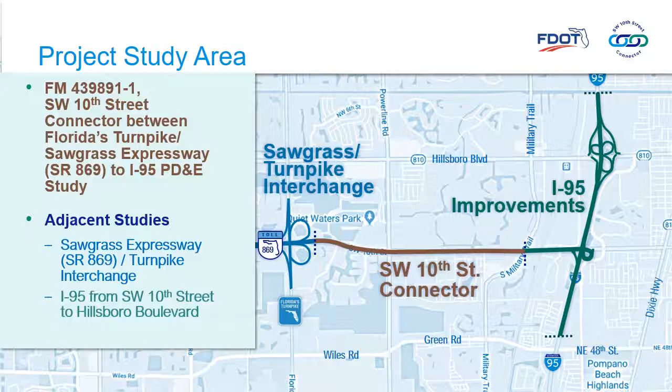The Southwest 10th Street Connector study is located between Florida's Turnpike and I-95. There are two adjacent studies that include I-95 from Southwest 10th Street to Hillsboro Boulevard and the Sawgrass Expressway and Turnpike Interchange. The Broward Metropolitan Planning Organization, or MPO, formed a Community Oversight Advisory Team, or COAT, to provide recommendations for the project study area. Recommendations such as safety, improved operations, and environmental considerations have been incorporated into the project's purpose and needs statement, and all recommendations are being fully evaluated during the study.

The purpose and need for the Southwest 10th Street Connector is comprehensive and includes many of the COAT's recommendations. Providing a limited access managed lane connector facility along the corridor between the Sawgrass Expressway and I-95 will improve system connectivity between Strategic Intermodal System, or SIS, facilities. I-95, Florida's Turnpike, and Southwest 10th Street are all SIS facilities. SIS facilities are those that are critical to statewide mobility and economic development.

Local transportation needs for Southwest 10th Street will be addressed, including the application of complete streets concepts. Safety and operational issues will also be addressed along the corridor and will improve emergency response and evacuation times, since I-95, Southwest 10th Street, and Florida's Turnpike are all designated evacuation routes. This project will also encourage intermodal relationships and economic development for the area. Next is a short video about the Southwest 10th Street Connector.

I've lived in Deerfield Beach for 15 years. Feels like nice Florida. Great beaches, great food, great atmosphere. It's easy to get to Miami, it's easy to get to West Palm Beach. Everything we could think of is located conveniently within the city. We love it here, and we wouldn't consider living anywhere else. But the traffic on Southwest 10th Street has always been a bit of a challenge. And more recently, we've noticed more traffic in non-peak hours.

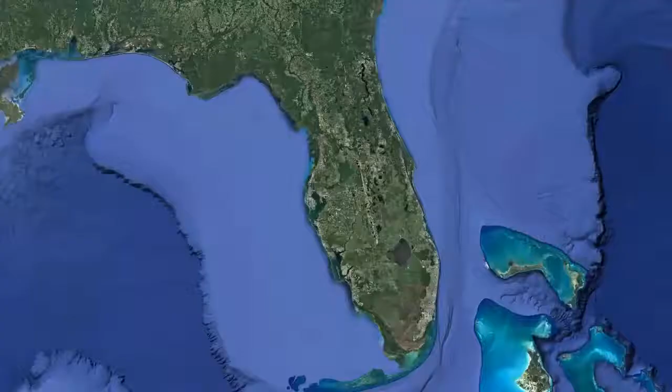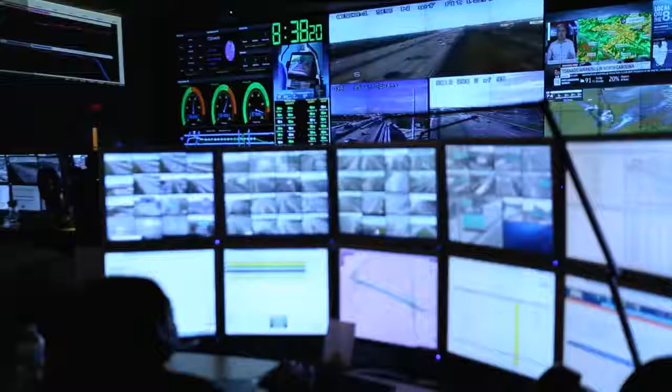The goal with Southwest 10th Street is to improve the connection to I-95, as well as provide a regional connection through a managed lane system to the Turnpike and the Sawgrass. In addition to those improvements, we will provide a new complete street local facility, which will provide bicycle, pedestrian, as well as vehicular mobility. Improvements to the corridor would allow us to actively monitor the roadway, to be able to communicate with first responders and to let them know what is needed, and we can send the proper resources out to mitigate incidents that occur.

By providing the managed lane system, we are significantly reducing the number of vehicles using the local Southwest 10th Street, which will reduce the travel time for those who are using the local facility, provide you a quicker time to get to your home and or business that you're visiting. If we want to keep growing and sustain that growth, we need to plan down the road and allow for this growth to happen. The connector will help our area as well in the fact that now people won't avoid 10th Street for fear of the traffic.

The end result will better my commute and better my experience with the road. 10th Street will now be a connector that people can get on and go to our local businesses and actually not have to worry about being stuck in traffic. Helping the local neighborhood and local residents, that is something to be excited about. It's a great opportunity for us to take advantage of working with our partners to solve our congestion problems today and into the future.

The Southwest 10th Street corridor represents a gap in the regional managed lanes network. This corridor is an important SIS link between the Turnpike and I-95. The Turnpike and I-95 are the backbones to the north-south movement for people and goods throughout the state of Florida.

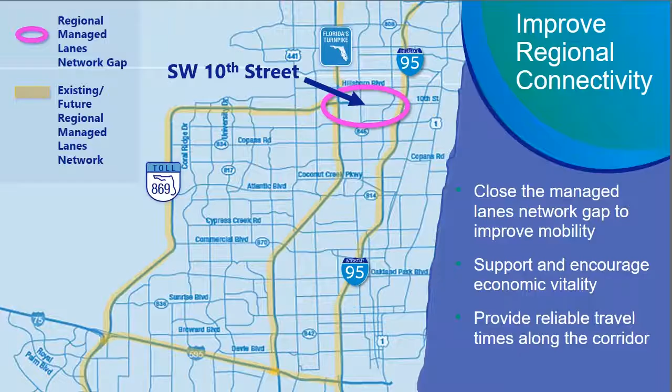Implementation of a managed lanes connector roadway, along with an improved local roadway for Southwest 10th Street, addresses COAT recommendations and will complete the regional network and promote mobility and economic vitality of the area. An improved local Southwest 10th Street will retain access to communities and businesses. Complete Streets elements will be incorporated in the design of the local roadway, including bicycle and pedestrian features, a lower speed, and landscape aesthetics features.

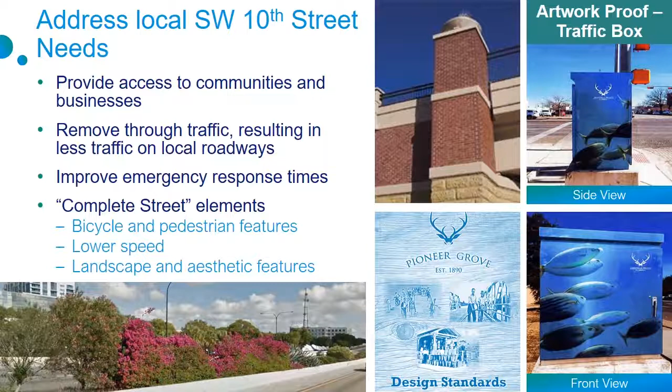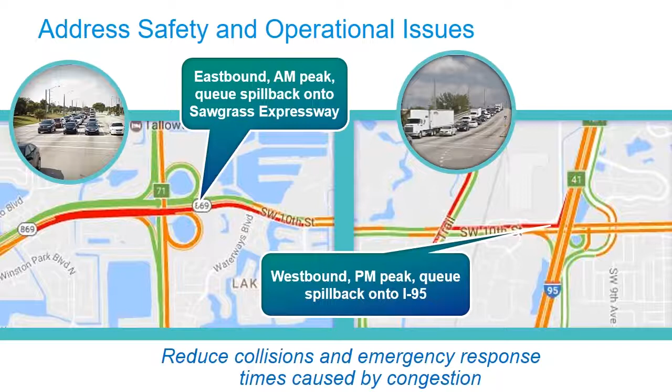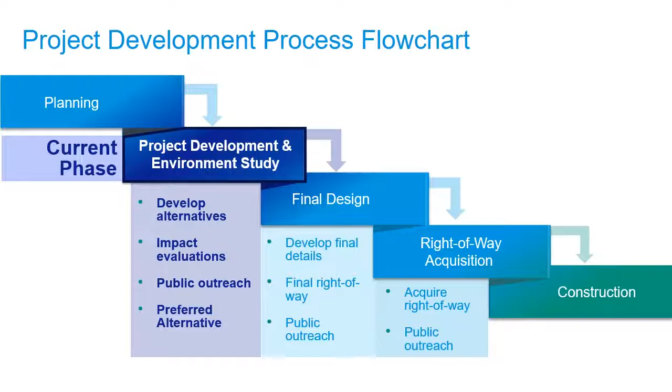In the PD&E phase, engineering design alternatives are being developed. Community outreach and agency coordination are occurring along with evaluations of environmental and community impacts. At the end of the PD&E process, the FDOT will recommend a preferred alternative. The PD&E process follows several steps. We're currently conducting the engineering and environmental analyses, holding the alternatives public workshop, and preparing draft documents.

During the engineering analyses, alternatives are developed to meet the purpose and need of the project. Potential impacts to the corridor's social, natural, and physical environments are being studied and documented. A continuous community outreach process is integrated into every step of the process to ensure that residents, businesses, and other stakeholders have opportunities for participation and meaningful input throughout the PD&E study.

All design alternatives have been developed and refined throughout the study process to meet the project's purpose and need and avoid or minimize impacts to the community, natural, and physical environments while incorporating as many COAT recommendations as possible. The alternatives are being compared to each other in an evaluation matrix using common criteria such as community and environmental impacts, traffic operations, and others to determine which alternative has the least impacts overall while providing the most long-term benefits for the stakeholders. As part of any PD&E study, a no-build alternative is always carried forward and included in the matrix. The matrix is included in the project exhibits.

The team is evaluating two facilities within the Southwest 10th Street corridor. One will be a managed lane facility to provide a connection between the Turnpike, Sawgrass Expressway, and I-95. Concepts will be evaluated with different entrance and exit ramp locations between Powerline Road and Military Trail for access to and from the managed lanes and local Southwest 10th Street. The extent of the below-grade section is being evaluated for the managed lane facility and will continue to be developed as the study progresses. The other facility will be a local, lower-speed roadway to serve businesses and communities within the corridor. Bicycle lanes, sidewalks, and other community elements will be included.

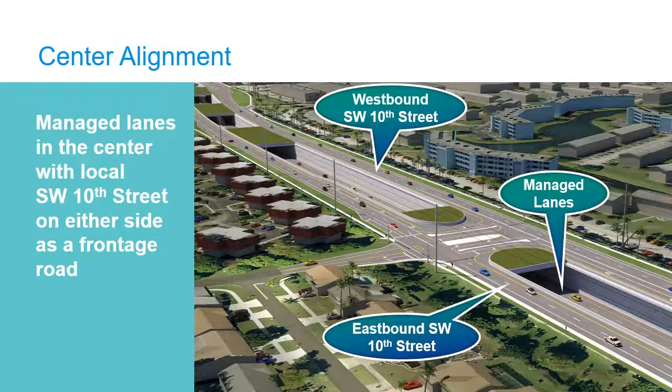In April of this year, the first Alternatives Public Workshop was held. A center alignment and a north alignment were presented. The center alignment presented in April is shown here. The managed lanes are in the center, with the local Southwest 10th Street on either side as a frontage road. This is the north alignment, which places the managed lanes in the north side of the corridor and the local lanes in the south. Based on feedback from the April Alternatives Public Workshop, community and stakeholder meetings, the north alignment was favored.

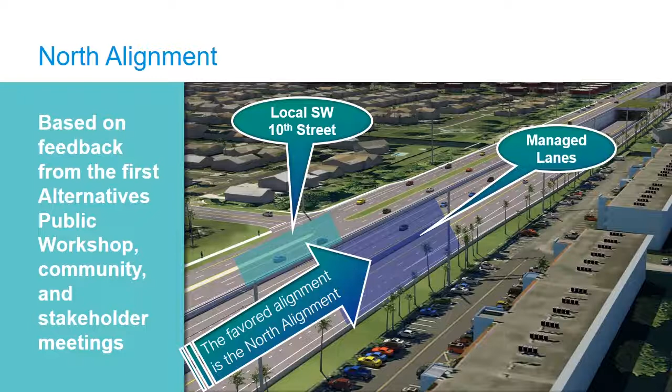Based on feedback from the previous Alternatives Public Workshop, other alternatives are being evaluated. In particular, a series of partial depressed options, which reduce the length of the below-grade section, are being examined, as well as a non-depressed option. The full depressed alternative has unique concerns, including construction impacts, drainage issues, and fiscal considerations.

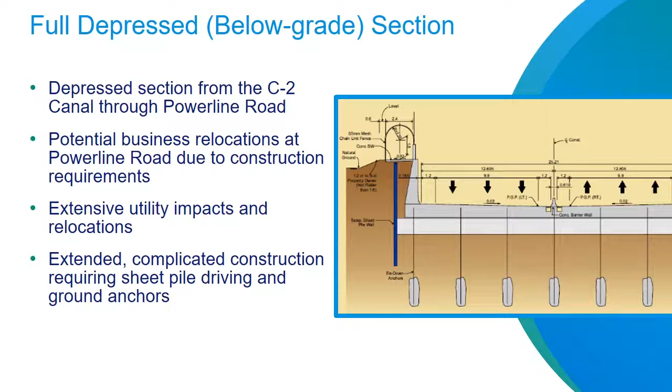With a depressed or below-grade section, there are potential impacts at Powerline Road due to construction requirements. Extensive utility impacts and extended and complicated construction, including dewatering and ground anchors, are required with this option. The limits of the fully depressed option would have an impact to Quiet Waters Park, while pump stations would be necessary for any depressed options. Noise barriers would also be warranted for a depressed section.

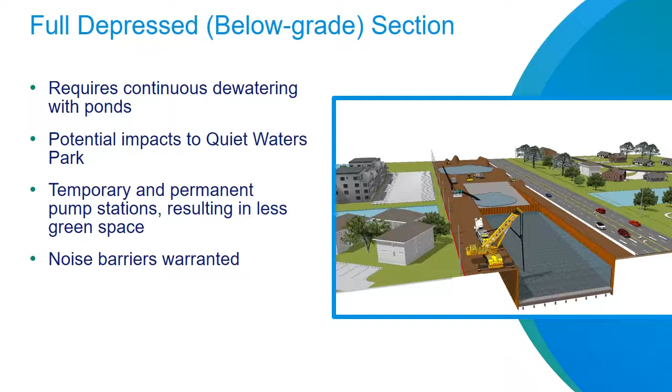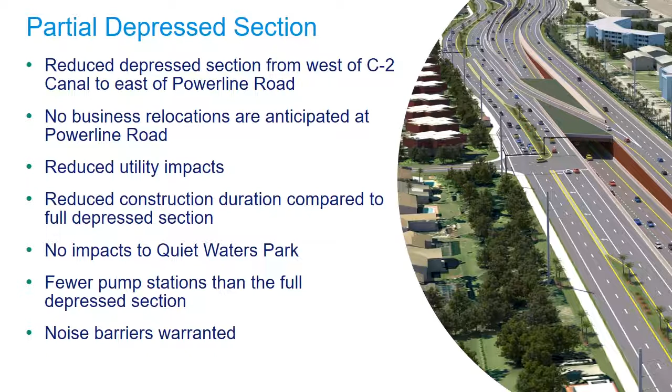With the partial depressed section, the managed lanes are depressed from west of the C2 Canal to east of Powerline Road. There would be no business relocations anticipated at Powerline Road, and utility impacts are reduced. The construction duration and number of pump stations are reduced compared to a full depressed section. There would be no impacts to Quiet Waters Park, and noise barriers would be warranted. With the non-depressed section, the managed lanes are at the same level as the local Southwest 10th Street lanes, and there would be no business relocations anticipated at Powerline Road.

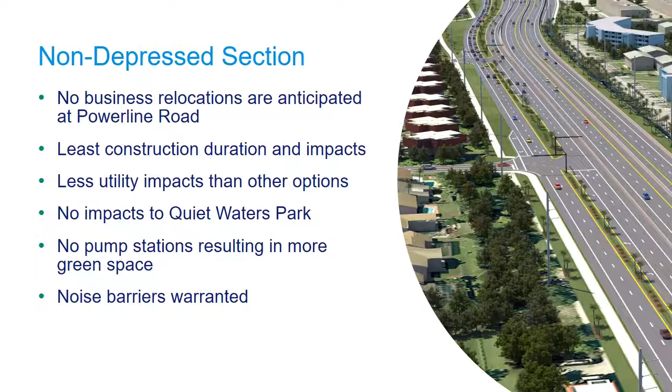This alternative has the shortest construction duration as well as the least utility impacts compared to the depressed alternatives. Also, there would be no impacts to Quiet Waters Park, but noise barriers would still be warranted.

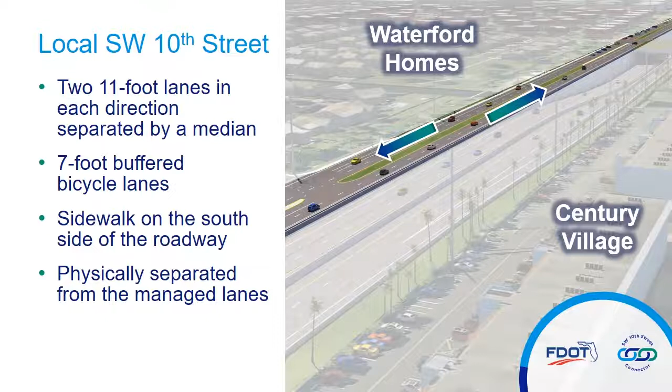Features of the local lanes for Southwest 10th Street include two 11-foot lanes in each direction, separated by a median. 7-foot buffered bicycle lanes will be included as well as a sidewalk on the south side of the roadway. This local roadway will be physically separated from the managed lanes.

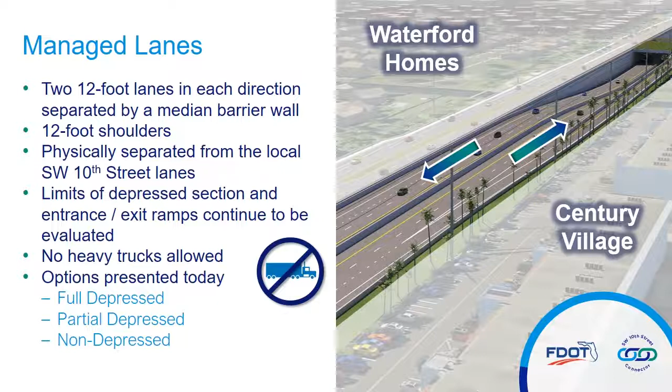Features of the managed lanes include two 12-foot lanes in each direction, separated by a median barrier wall. 12-foot shoulders will be provided. The managed lane system will be physically separated from the local Southwest 10th Street roadway. Limits of the below-grade section as well as entrance and exit ramps to the facility continue to be evaluated. Per state policy, no trucks over 2 axles will be allowed to use the managed lanes facility.

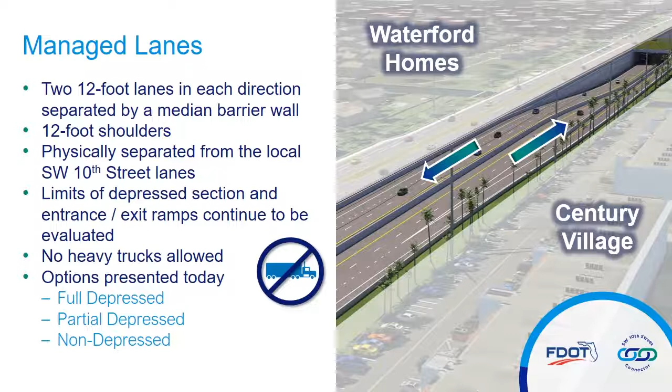3 options are presented today: a depressed alternative, a partial depressed alternative, and a non-depressed or at-grade alternative. As with all PD&E studies, FDOT will consider the no-build alternative throughout the PD&E study. With the no-build alternative, no improvements will be made to local Southwest 10th Street and no managed lanes will be

constructed. While this alternative requires no expenditure of roadway funds, requires no right-of-way, and has no construction impacts, the no-build alternative will allow traffic conditions to worsen, increasing congestion, time delay, emergency response times, and fuel consumption. Noise levels will increase and air quality will decrease. Next, let's compare the operations of the build and no-build alternatives.

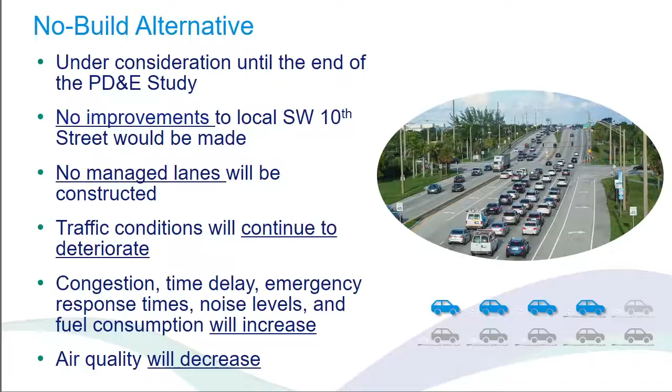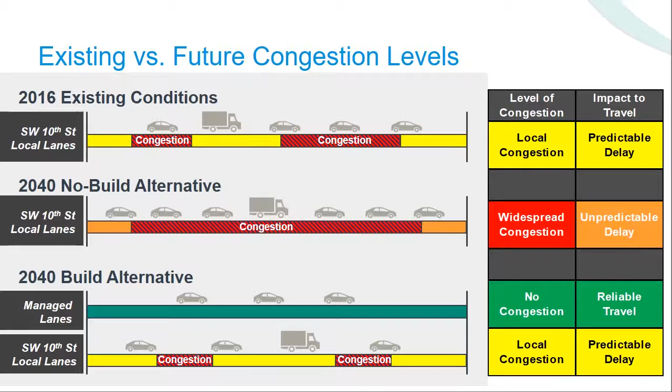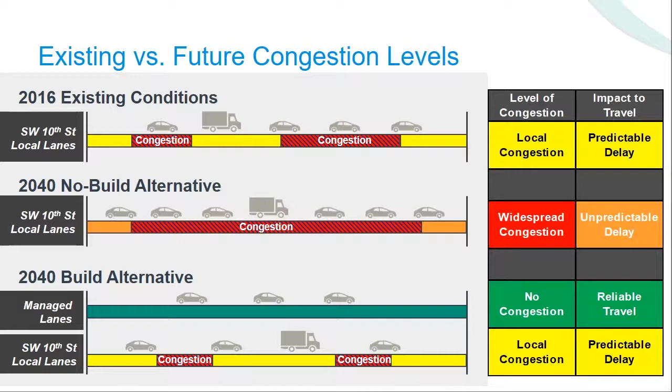Today's traffic and congestion is shown in the top graphic, which indicates local congestion but predictable delay. If no improvements are made, congestion will continue to increase as illustrated in the 2040 no-build alternative, which shows widespread congestion and unpredictable delay. The 2040 build alternative graphic illustrates the congestion levels for the managed lanes and the local lanes as forecasted to the year 2040. Note that this final graphic separates the local and managed lanes as designed in the build alternatives and operates with predictable but reliable travel times along the corridor.

In terms of traffic congestion, the 2040 build alternative provides significantly better traffic operations than the no-build alternative. By removing through traffic from local Southwest 10th Street and offering motorists a managed lane choice, east and west travel times are reduced. A significant improvement is the 40% reduction in intersection delay, as 40% of all traffic will be in the managed lanes. These improvements also result in reduced emergency response times.

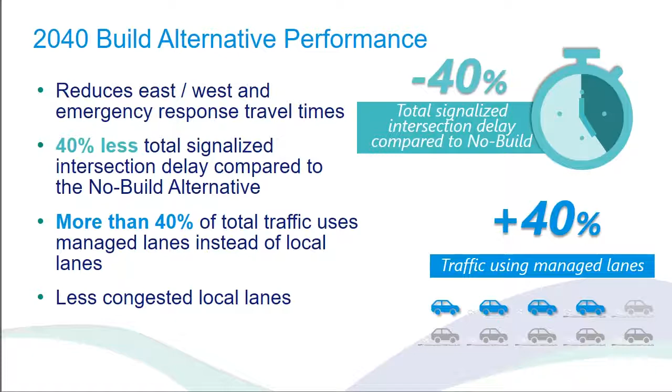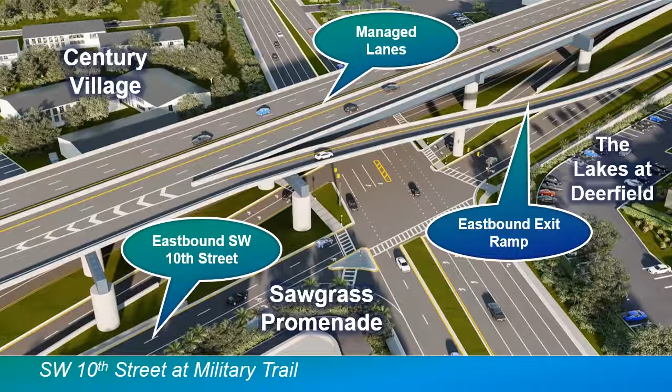Currently being evaluated are the locations of the entrance and exit ramps to and from the managed lanes to local Southwest 10th Street. An eastbound entrance is planned for east of Powerline Road and an eastbound exit east of Military Trail. A westbound entrance is planned for east of Military Trail and an exit ramp west of Military Trail.

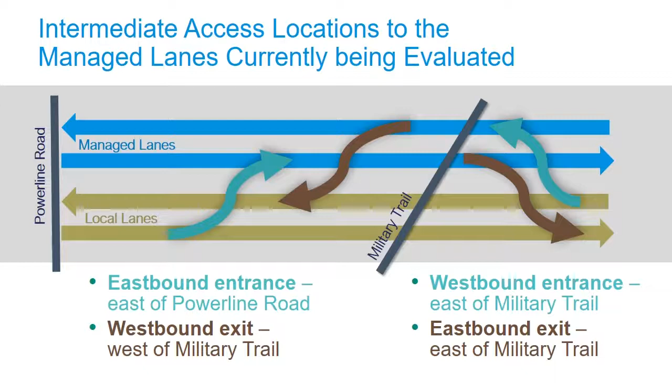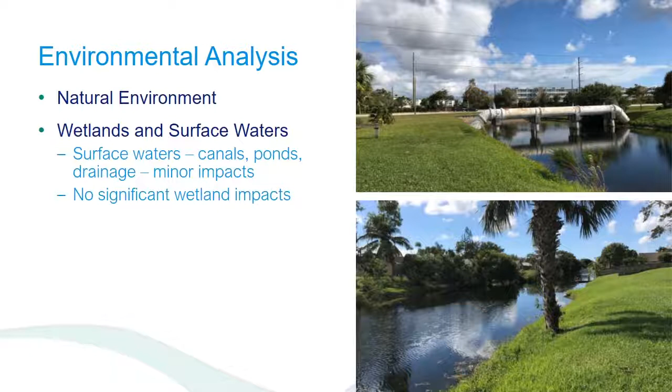For the Southwest 10th Street connector improvements, each build alternative is evaluating the natural, physical, cultural, and social environments with a goal to avoid or minimize impacts to these resources. No wetland impacts and only minor impacts to surface waters are anticipated. No adverse effects to endangered or threatened species are anticipated. A bald eagle nest is located in the Turnpike interchange area, although no adverse effects are anticipated. Results of the environmental analyses have been documented in the Natural Resource Evaluation.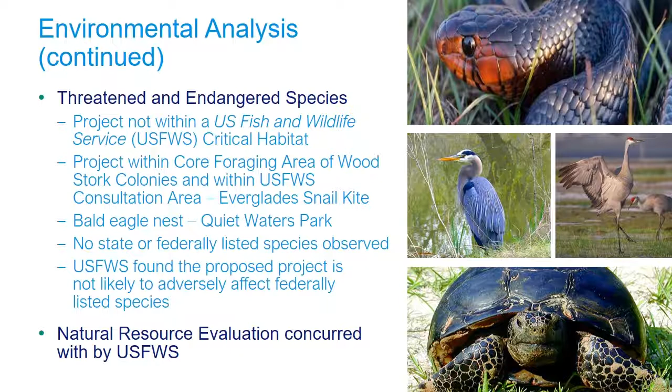A sociocultural effects evaluation is ongoing, and a cultural resource assessment survey has been prepared to evaluate the effects to historic and archaeological resources. Preliminary evaluation indicates no adverse effects. There are 2 resources protected under Section 4(f) of the U.S. Department of Transportation Act: Crystal Heights Park North and Quiet Waters Park. No permanent impacts to these parks are anticipated, but temporary impacts may occur depending on the alternative chosen. Coordination is ongoing with Deerfield Beach and Broward County regarding the park resources.

Multimodal accommodations are being incorporated into the project improvements, which include sidewalks, bicycle lanes, and the encouragement of transit routes. A contamination screening evaluation has taken place. 23 contamination sites have been identified, however, no significant impacts are anticipated. A contamination screening report has been prepared, and an air quality screening is also being prepared.

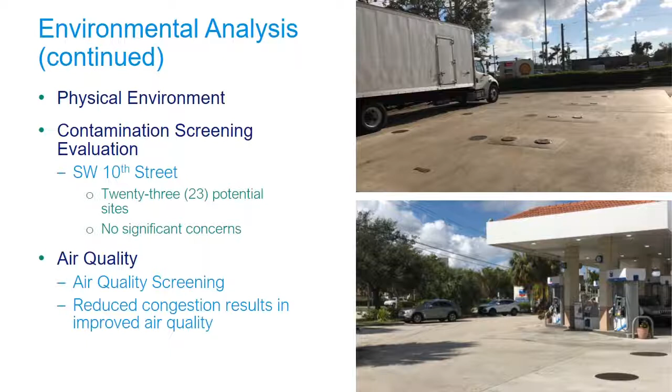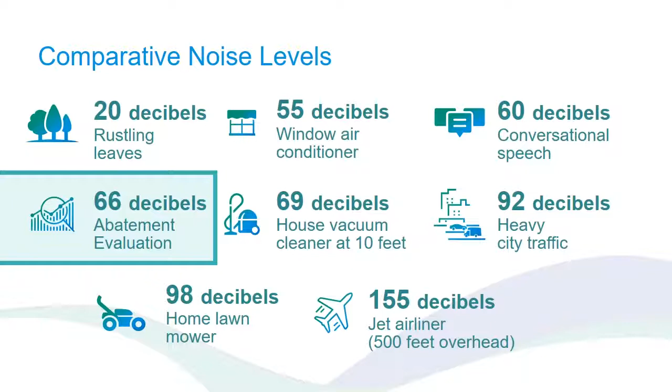These are some comparative noise levels to associate decibel levels with everyday sounds. Noise impacts are considered at or above 66 decibels. Perception of noise is related to the speed and volume of vehicles, as well as the type of traffic. For instance, 2,000 vehicles per hour sounds twice as loud as 200 vehicles per hour. Traffic traveling at 65 miles an hour sounds twice as loud as traffic traveling 30 miles an hour.

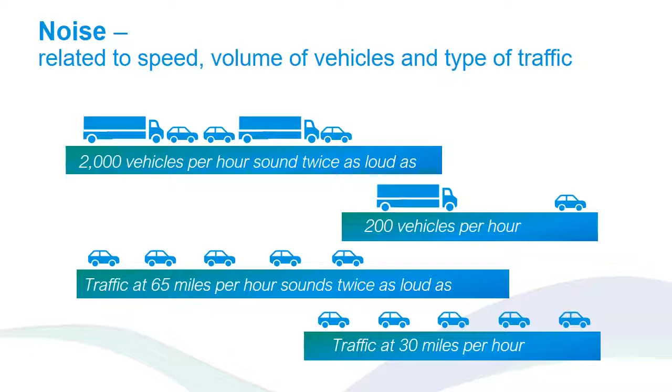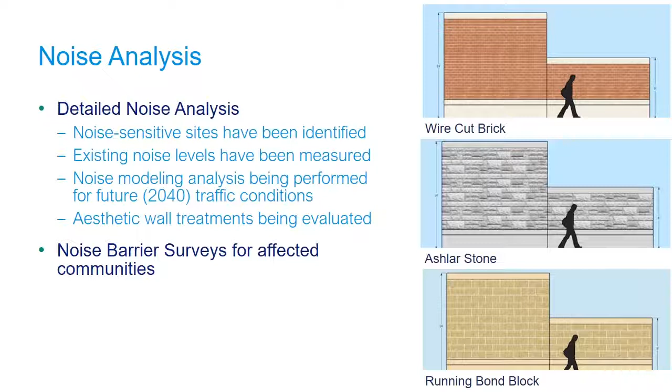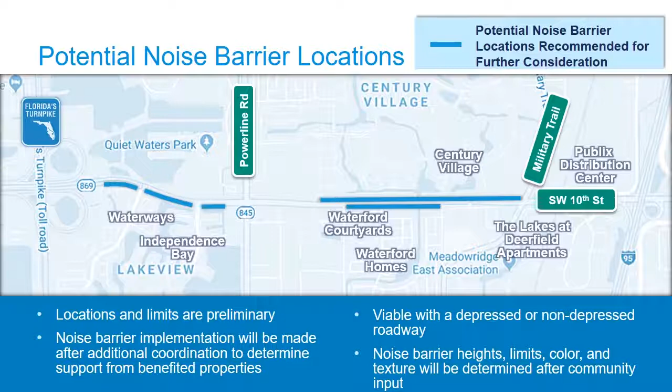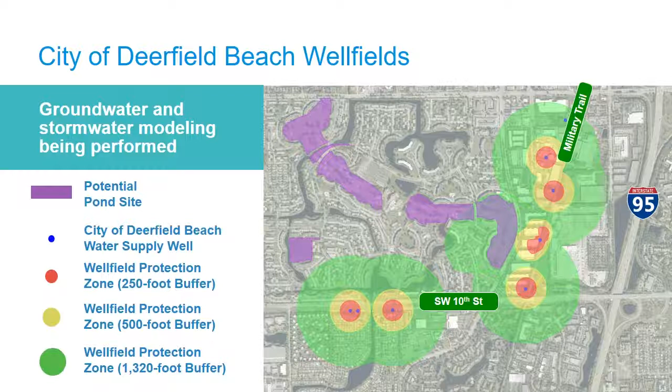Water supply wells for the City of Deerfield Beach are located within the corridor. In order to assess the impacts of a proposed depressed section on the well fields, groundwater modeling is being performed. As you can see from this graphic, the well field protection zones extend into the project areas and are a very important consideration. The FDOT has planned and funded 2 future landscape projects to address landscape and aesthetic elements along the corridor for installation after construction of the roadway improvements. As the PD&E alternatives are developed, landscape design concepts will be developed and coordinated with the city.

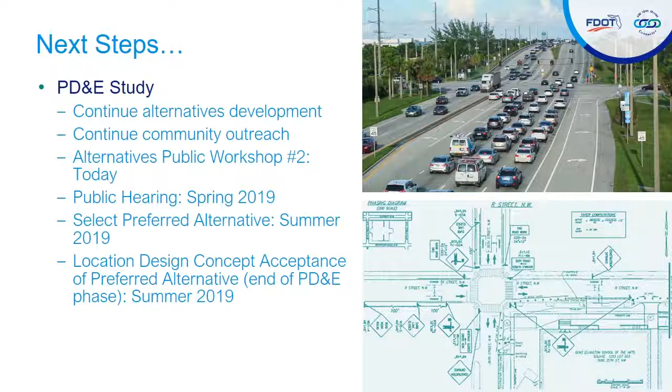As we move forward, alternatives will continue to be developed and refined. Public outreach is continuous throughout the study, and interested groups are encouraged to contact the project team, who are available for group meetings. The team looks forward to meaningful stakeholder engagement and welcomes all input. The workshop today represents an additional opportunity for you to provide your input and feedback to the team on the engineering concepts being developed. The public hearing, anticipated in the spring of 2019, is another meeting where you can provide your comments.

Please visit the display room across the hall where you can talk with project staff and examine the concepts up close. This concludes our presentation, and we thank you for attending this Alternatives Public Workshop.